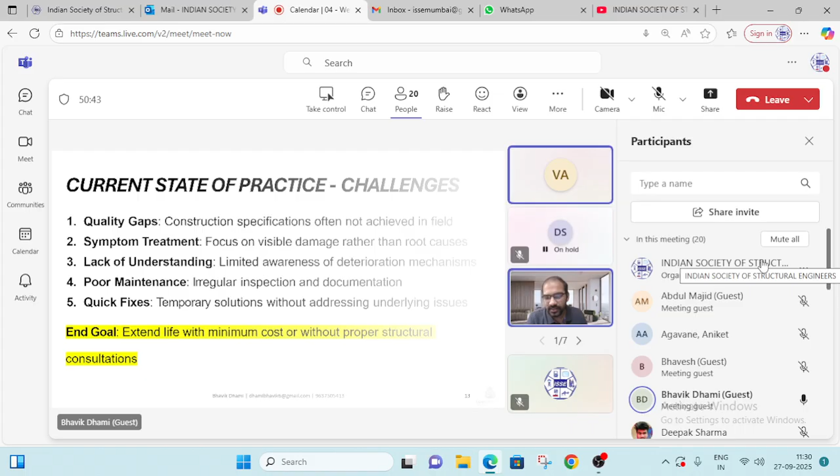You went on mute, Bhavik. Unmute yourself. Sorry, sorry. Wait a minute. Am I audible now? Yes. Has this been covered or was it muted? Yeah, this is covered. Only 1 second it went on mute. Okay, okay. This also has been covered now. Yes, yes. Okay, thank you.

So now you might be wondering, like I told previously, 90% of the problems are always related to corrosion. For example, after building a structure, there is cover available, but over time it gets some cracks, or after curing there are some shrinkage cracks. So some water enters into that particular concrete. That is a pictorial representation of when the water enters and comes in contact with the steel rebar in the concrete.

So what happens? The water starts to form cathodic and anodic reactions there. So there is pit formation on the rebar, which forms corrosion in the concrete, which starts the deterioration of the steel rebars. So that is the whole reaction there. The anodic part is there, so we require a cathodic part, which has a medium due to the water.

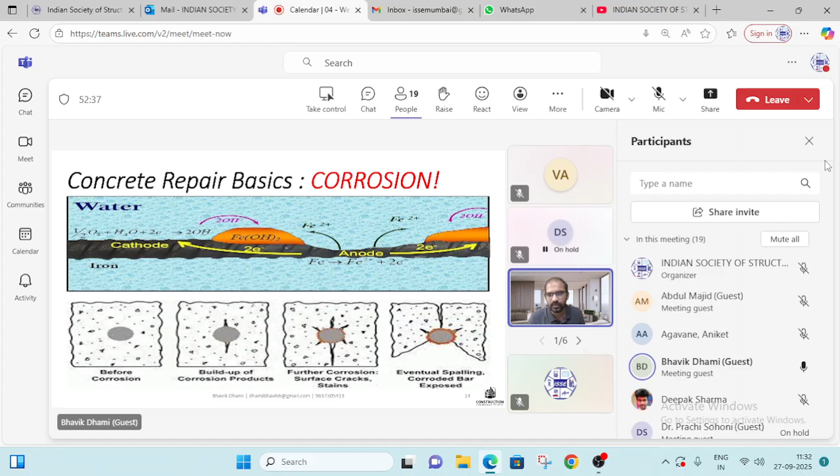Now, a plan view has been placed below here, showing how the corrosion starts and how cracking forms due to the corrosion. Before corrosion, in the plan section, you can see there is a rebar and the concrete, and over time, corrosion builds up around it. One, two, three pits are formed, then four, five pits start to form. Now that corrosion starts to accumulate on the steel rebar. So there is some gap, and due to the increase of the cross-sectional area around the rebar, cracks start to form and eventually spalling of the concrete occurs, and it is exposed to us as concrete repair being required.

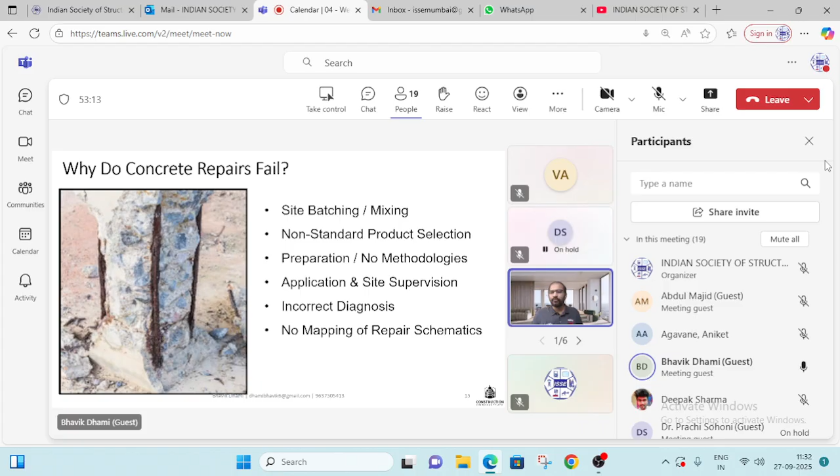So basically, why do concrete repairs fail? This is a column representing how the corrosion might look on the rebar. As I previously mentioned, they have been using site mixing, they are using non-standard products. There is no proper methodology, no proper supervision, even though the diagnostic has been done by the asset owner, but not with proper structural engineers. So proper methodology was never there, and no mapping of the repair schematics has been done or followed on site.

Now, an overview of general causes of why distress happens in concrete buildings. If you see, the majority of it is due to extreme loads. The design parameter has been changed. The structure was designed for a particular load, and now the utility has been changed. As you know, previously the concrete was not waterproof. They might use some lower grade of waterproofing material, or a non-standardized procedure, or a bitumen layer, which degrades over time.

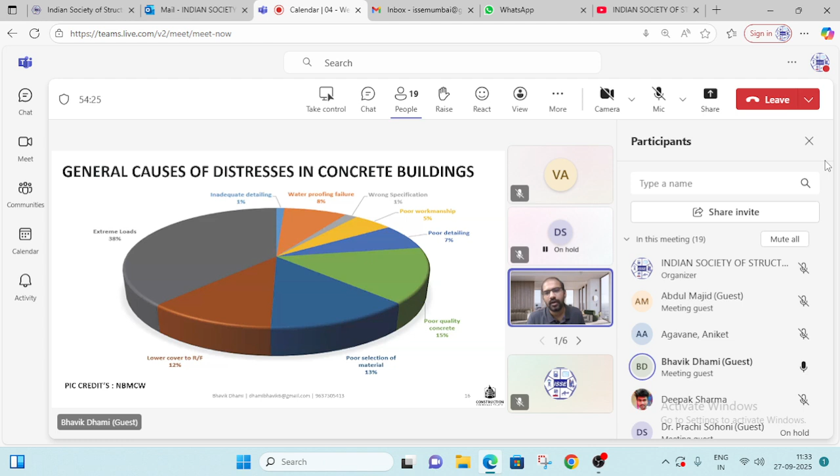So maintenance was not properly done or the workmanship is not proper. Detailing of the products or the requirements of the schematic system were not provided. Then poor quality concrete has been used, poor selection of materials. So basically, more than 50% is due to extreme loads, poor quality concrete, and poor selection of materials. And the minor part is waterproofing failure. This is the whole overview of how distress comes in concrete buildings.

Now, previously I have been talking about the repair practice that has been carried out. If you want to basically assess a building, like if you are a structural engineer, some society building comes to you and says, I want to do an NDT report, or you can say structural assessment. So there are four stages that need to take place while doing the structural assessment. Stage one would be preliminary assessment, like inspection: what is the scope, what repair has been done, the history collection, what the society members are looking for, what their scope is. We should do a one-on-one face meeting or individual meeting with the society and understand their scope and their requirement.

Then the next stage would be planning: what kind of damages you can find, what the member grouping is, and what test planning you will be covering based on your preliminary inspection with the society and site visit. Now after doing all those, you need to record all the visual inspection. So systematic documentation needs to be prepared, photographic records should be kept. You need to specify at which particular location what particular damage has been mapped. So you have to prepare a whole visual report of that.

Now in stage 4, you will be required to take a field visit and do lab testing. So you will have some NDT techniques, non-destructive evaluation techniques, or material sampling, like cores can be taken out from the structural element at different locations. We have to do the detailed analysis of both the reports and understand what is happening inside the concrete through this field and lab testing part. So to arrive at a conclusion, we require these four stages to take place for any structural assessment. It would be the same for industrial grade buildings, for infrastructure, or for any structure which is concrete in nature, or even for steel structures.

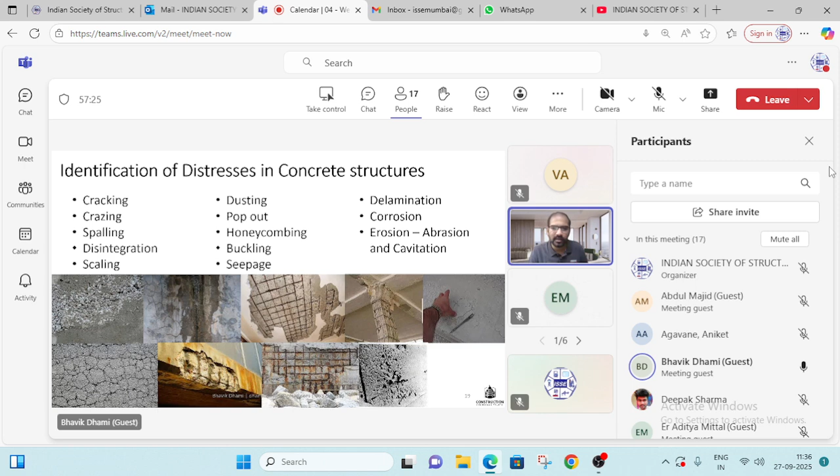So now we will be starting with the visual inspection. If you are on site, you need to identify the causes of the distress in the concrete structure. You might be able to see some cracking, spalling, disintegration, dusting coming out, honeycombing, or the structural element has buckled somewhere, or some sort of corrosion or cavitation has formed on site. These pictures can be used as an overview to understand how distress looks in concrete structures. The basic one you will see is corrosion or spalling. That is why you have been called, because normally honeycombing would be in new construction or during the repair phase when the proper material selection or proper mix was not used.

And one of the major things: whenever you are visiting site and you see a crack, there might be structural grade cracks and non-structural grade cracks. So you should have a crack gauge. It defines from 0.3 mm to 10 mm, different kinds, as you can see in this picture here.

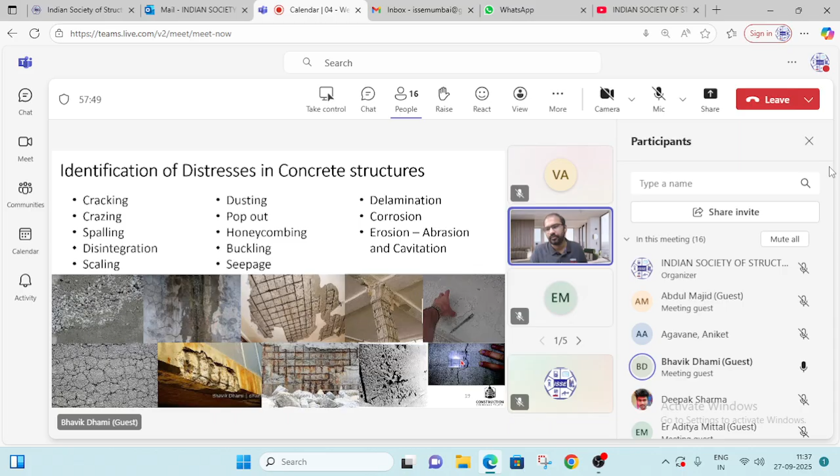Now, you have looked at all those pictures to understand how cracks look, but how do we define the different types of cracks? They can be defined into two categories: before hardening and after hardening, when the concrete is not set and when it has been set and cured. For example, before hardening there might be movement in the concrete due to form movement or subgrade movement, or plastic stage cracks, shrinkage, settlement cracks, or freezing. When the concrete gets hard, there might be physical causes, alkali reaction, drying shrinkage, or restraint shrinkage. Due to variational or seasonal temperature, you might see expansion and contraction, so there are thermal related cracks after the hardening of the concrete.

And like I previously told, the structure might be in some different area or environment, like chemical. So in the coastal environment there might be some pollutants, or in the urea plant or the fertilizer plant there might be some sulfate action, or you can say attacks taking place on the concrete, which might be the cause of cracks in the concrete over time.

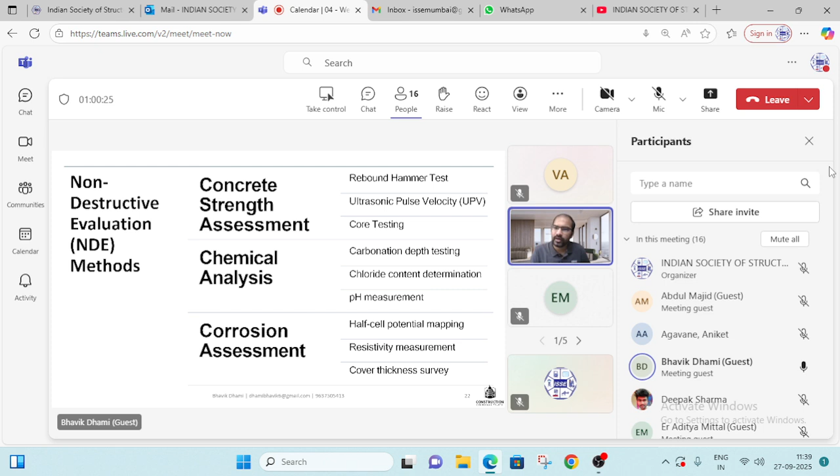So now NDT, you might all have come across this particular terminology. So why do we do NDT? Basically, it is used for concrete strength assessment, chemical analysis, and corrosion assessment. So these are the tests that we covered during the NDT part: rebound hammer, UPV, core testing, carbonation, chloride content, pH measurement, half cell potential, cover thickness.

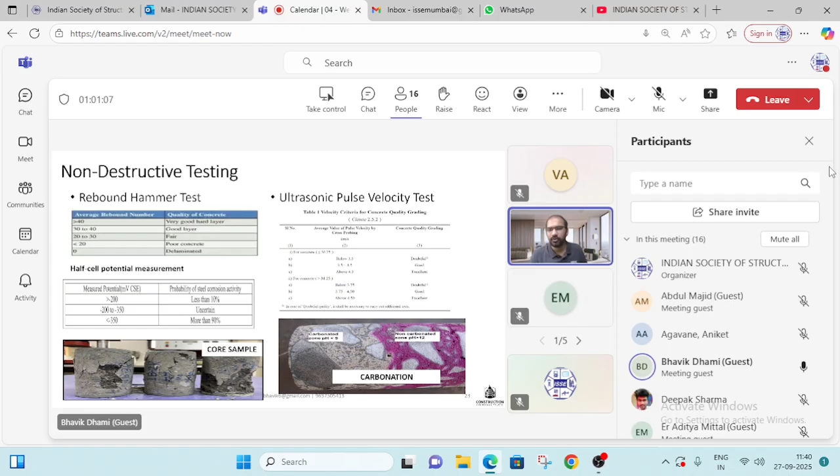From core, we will have the actual strength of the structural member. And from carbonation, we can understand the pH of the concrete, whether it is less than 9 or greater than 12. So just to summarize, what is the accuracy of each NDT method? For rebound, it might be less. UPV will be less, but for core, it will always be high. And half cell potential is a probabilistic method.

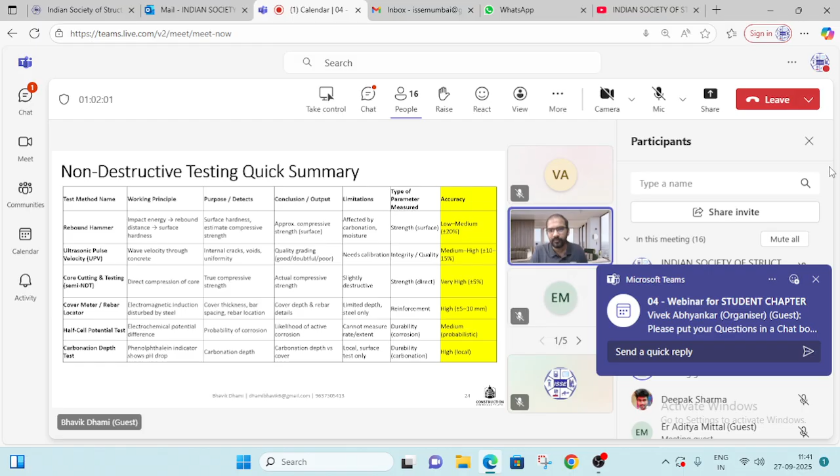In this chart you can understand how it works. For rebound and ultrasonic UPV, we will just be able to understand surface hardness and correlate what the voids and uniformity are. From core testing, we will have the true compressive strength, the actual value. Now, based on all this, we will be moving ahead, because if I cover it, it will take a lot of time. So if you have some doubts in this, we can always come back to this part.

Now, previously we have covered structural assessment stages 1, 2, and 3. Okay, stage 4 has also been covered. Now we are moving to a new section of our discussion. It will be design: how to design a repair methodology altogether for a concrete repair. So, what are the parameters that we need to take care of?

We need to take care of repair materials. So what are the physical properties? What is the chemical compatibility? What is the performance requirement? Whether it has low shrinkage, what is the thermal expansion, you should understand all the physical parameters. Then what is the pH of that particular material or the environment, whether it is low permeable, whether it requires chemical resistance.

And performance requirements are basically the bonding and the mechanical, like whether it is under static loading or dynamic loading, and what is the minimum criteria or the curing period, because some structures might have a requirement of curing of 3 hours or 1 day. So basically product selection needs to take place while designing repair materials.

Now what are the different types of repair material? Previously I have told about the polymer materials and the cementitious materials. In cementitious materials, there are PMM or micro concretes. Some grouts are also there. And in polymers, you might have some acrylic polymers, then epoxy mortars. Now, what is the selection criteria for any material? It is the same parameters that we have discussed, because we should be able to define the long-term exposure and long-term scope of the material based on our objective.

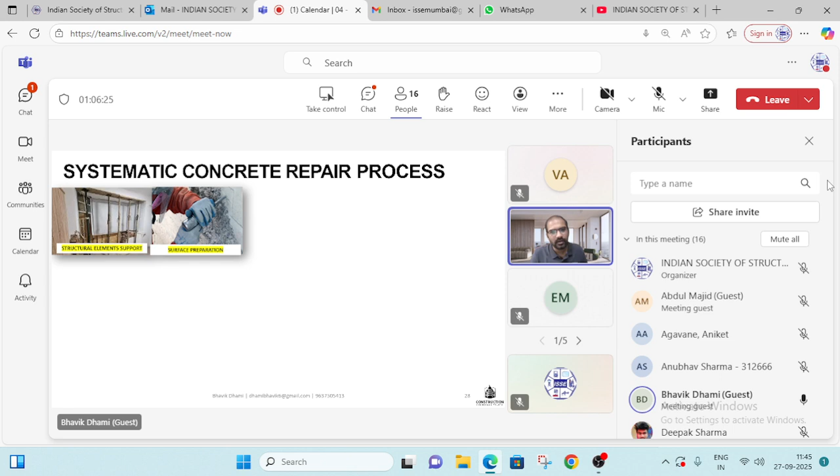Same as what I have discussed, the different phases, there is a pictorial representation. So this is how you might need to support. This is how you will be breaking. This is a corrosion control sacrificial anode that has been connected. This is a rebar that we are treating right now. Then this is how the injection grouting takes place. If you see, there is a nozzle and the crack has been covered properly. When we are applying the bond coat, proper geometry has been taken care of.

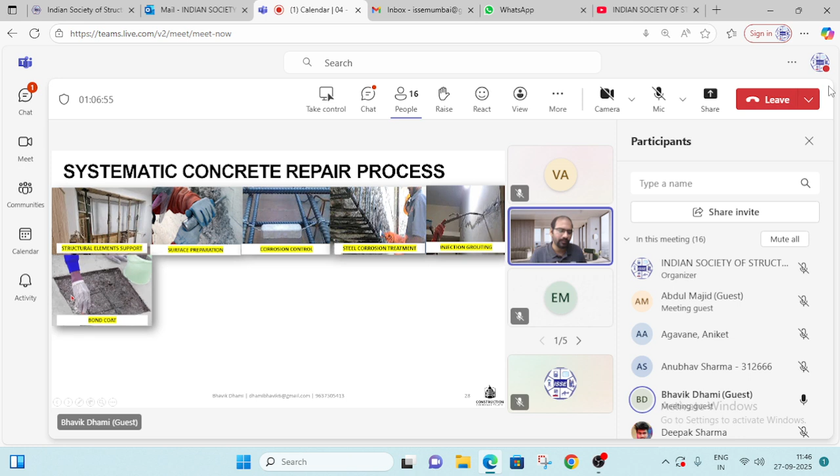Now there is a rough surface on the polymer final surface, so that additional plastering can take place after the polymer treatment. If you are not going with polymer treatment, you might require section enlargement, depending on the scope, or an FRP system. You are not going with the micro concrete, but you are moving ahead with the FRP system or steel plate bonding. It depends on our economics altogether. And this is the curing compound placed on, and the protective coating.

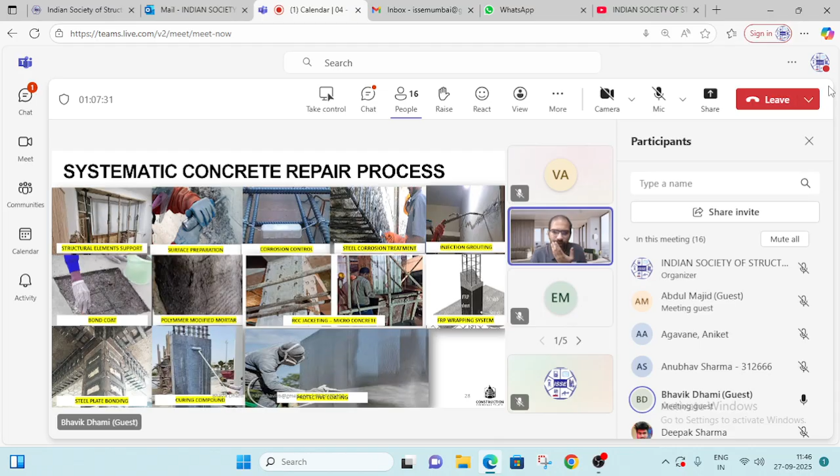Now, previously I was talking about the surface preparation part. Why is surface preparation basically the main part of a concrete repair? Basically, at the international level, we have defined CSP 1 to CSP 10: what kind of roughness is required for what kind of treatment. Like if you are just sealing, like in the injection there were some cracks we have to fill, sealers might be able to satisfy CSP 1 and 2. If we are going for protective coatings, the surface preparation needs to be CSP 3 to CSP 5. For polymer treatments, CSP 5 to CSP 9.

Then if we are placing some additional micro concrete, it might need more roughness, like CSP 10, ranging from 5 to 10. So this is the basic part if you are trying to bond. Basically what people think is, if you have just applied the bond coat, it is more than enough. But I will tell you, the mechanical adhesion or mechanical bonding also needs to be taken care of, so during the inspection of the concrete repair execution you should always check what the CSP requirement is and whether the profile has been properly achieved on site or not.

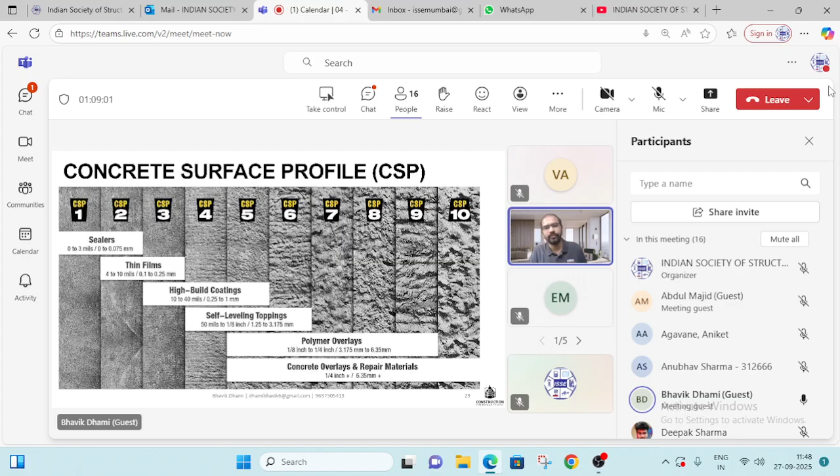Now, previously I was talking about after micro concrete or before PMM, there might be some changes, like it is not a cosmetic repair. Now, as per your project requirement, you have to propose some strengthening because your residential building has taken some load and is now used as a commercial building. So there might be some section enlargement, some external reinforcement or load redistribution criteria that you need to satisfy during your project phase. It basically covers increased load capacity, or a different system like FRP wrapping, based on your economics. We would propose these strategies for strengthening in the concrete repair.

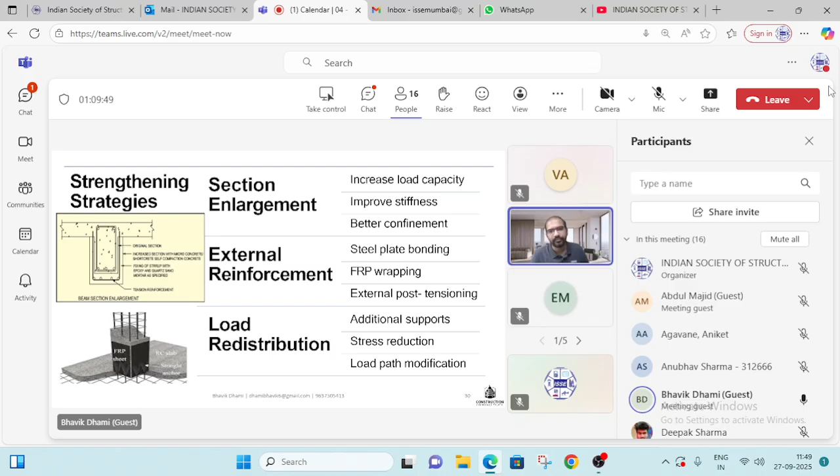Now, you have done everything properly, but we should have some framework to assess the material quality or the repair project quality. So we should always use material control parameters, like a standard grade of material, ready mix instead of site mix on site, and the workmen have to be properly trained. If you are using a certain product from a manufacturer, you should ask that manufacturer to perform a demo, or do a mock-up on site to understand how to implement it. You should also have a session with the manufacturer to train your team for that project, and be aware of the do's and don'ts of the products through the manufacturer's guidelines.

Now, we give some structural assessment and recommendations. We should also monitor: during the pre-repair phase, what was the strength, and during execution we monitor with a checklist. Post-repair, we should also have material analysis of whether we have achieved our target or not, like preparing cubes if you are doing micro concrete. Those parameters in quality assessment need to be taken care of. Next is the future maintenance strategy: documentation, periodic or preventive maintenance, do's and don'ts. These are repetition, so I will be moving forward.

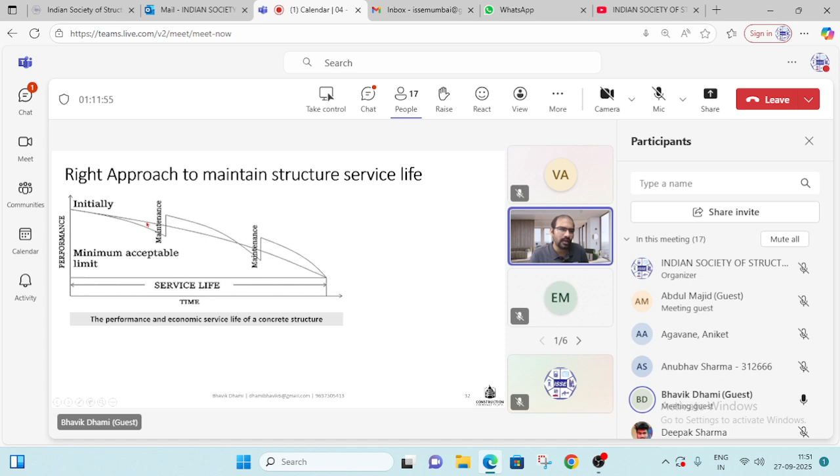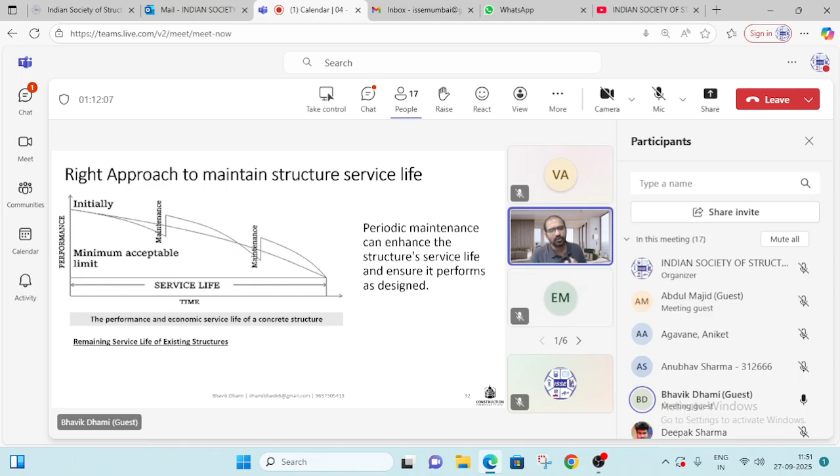So this is the whole graph of why we are doing concrete repair. Over time, the performance of the structure deteriorates over its service life. By doing some maintenance, the graph goes up a little, so performance is enhanced. So periodic maintenance is required. That is the whole reason behind the right approach to maintain the structural life.

Okay, so now, whatever we have previously studied about how the four stages have to be taken care of, the design methodology, the execution part, and how the quality framework works, let's do a deep dive into the case study. This is a four-story RCC frame residential quarters in Mumbai. I thank CPWD for the handbook having these case studies. Stage one is preliminary inspection: when was the construction done, what is the structure, what is the nearby location, and how many structures are you visiting?

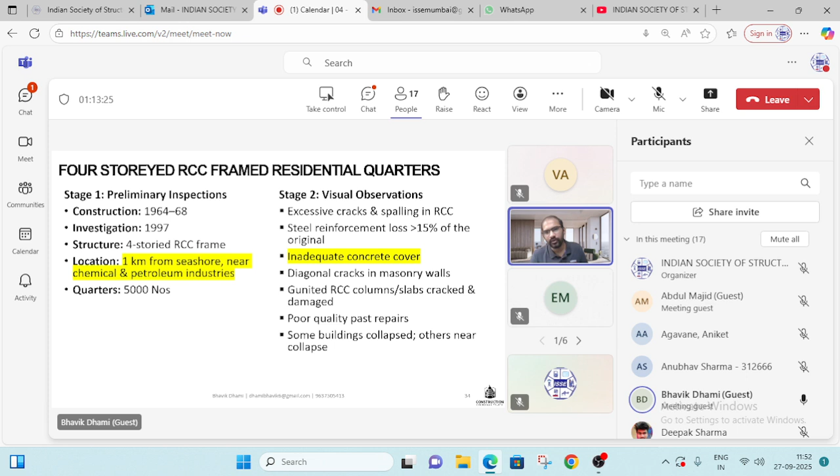Then through visual inspection, what kind of cracking are you seeing? Is there reinforcement loss, has the concrete cover gone? Are there cracks in the walls? What sort of concrete repair was done previously, or what damage can you see from your general overview? You have to record all those things. Here they were able to understand that poor quality past repair had taken place, and some buildings had collapsed and some were near collapse. Based on that assessment, we have to prepare the visual inspection report.

Now this is a photographical representation of how the building looks for one block of the type 3 quarters. So basically there are some cracks, there is some corrosion-related reduction in the balcony. Now you can see there is a damaged chajja over here. There are some RCC columns at the plinth level protection. The whole plaster has corrosion due to the steel reinforcement.

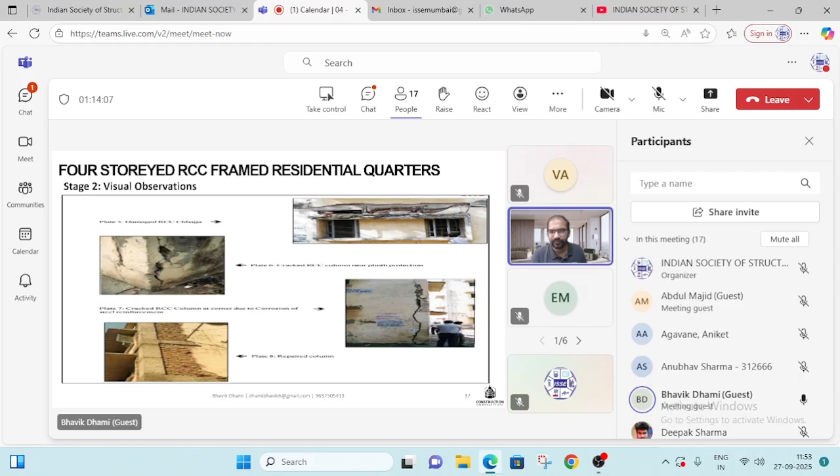Then there is a whole, you can say, lateral crack going up to a certain height through visual reports. And there are some ongoing structural repairs taking place, and how the structurally repaired block looks before finishing.

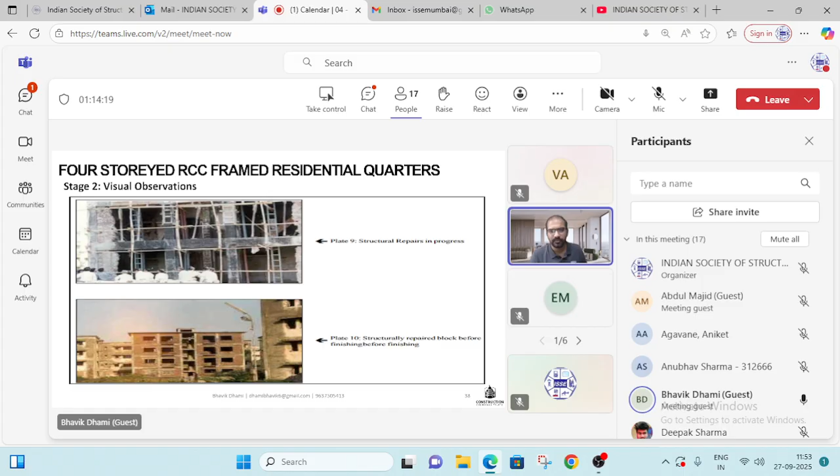So in stage three, we are looking for lab tests, like NDT reports and lab tests. So what we were able to find, the core strength is like 73.29 kg/cm², then carbonation; the rebound hammer had readings where 65% of the readings were 10 to 20 for surface hardness. In beams, it was a different range.

In ultrasonic, you might see the range as 0.64 to 2.5. The majority of the readings were less than 2 in the velocity. Majority of the readings were in the 60% criteria. In half cell potential, we can see the corrosion probability. 20% were less than the probability of corrosion, but 57% indicated uncertainty, and 23% told that there is a 90% probability of corrosion through the half cell potential.

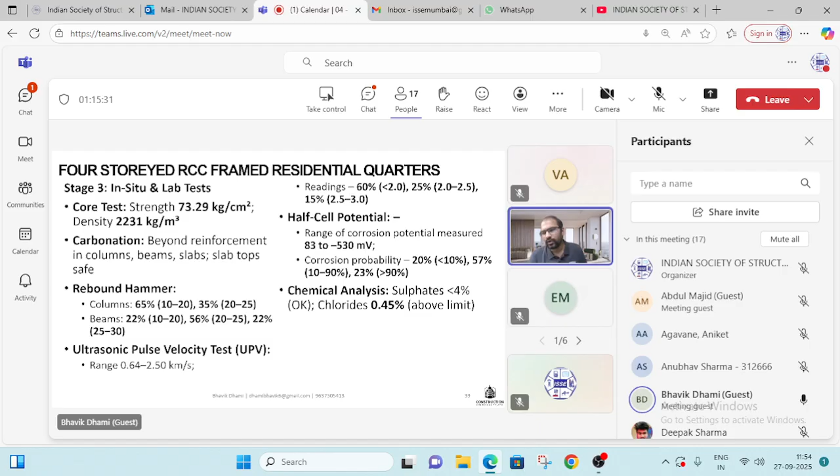So doing some chemical analysis, we were able to find that there was sulfate in the concrete structure. Chloride was above the limit since it was exposed to some refineries over there. So what are the conclusions we are able to come to from those? This is a repetition of what I have mentioned. There was chloride, high humidity, a hot climate, and the environment is a little bit acidic. So you have to give some conclusion based on your visual inspection, NDT reports, and what you have observed on site, like there is not adequate concrete cover.

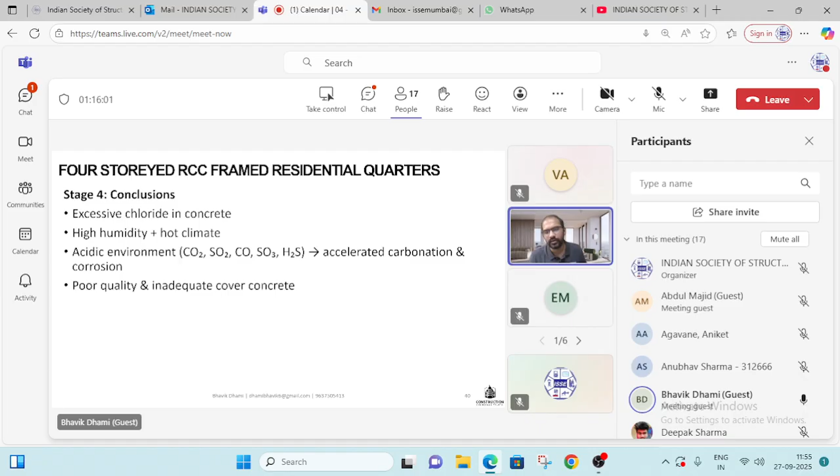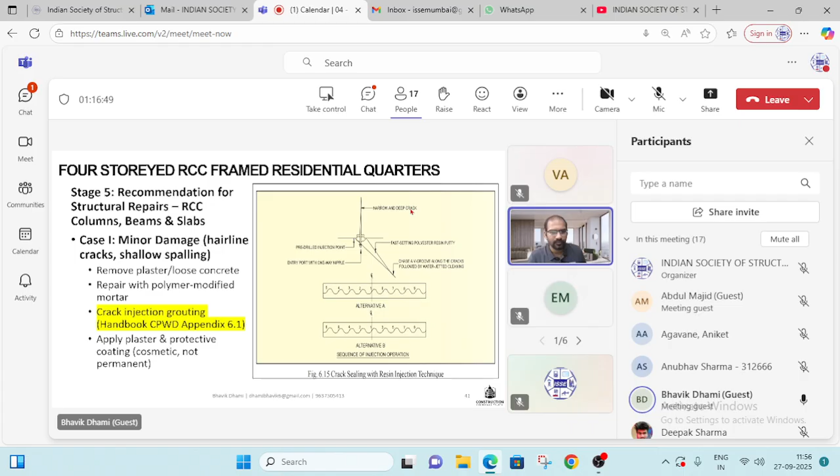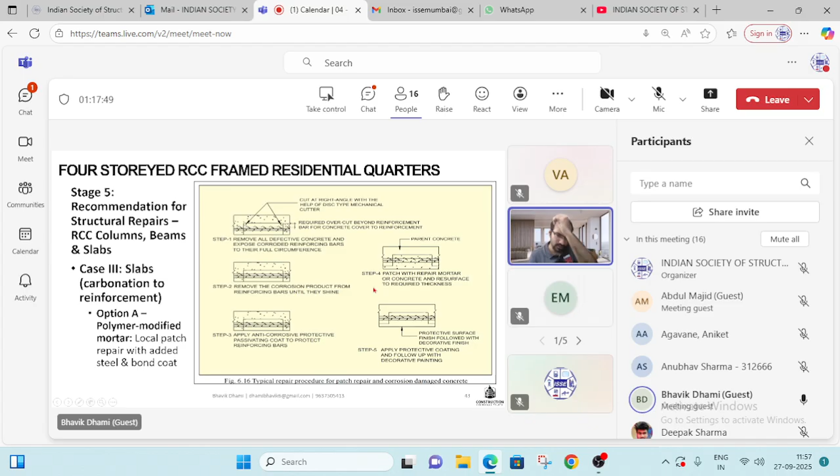And if it is severe, this is a pictorial of how it looks. See in picture one, they have removed all the defective part. They removed the corrosion product from the reinforcement, applied anti-corrosive, then patched with the repair, resurfacing to the required thickness. Now they have applied the finishing protective layer, or you can say finishing has been done with plaster, then covering with the protective coating. It is the same methodology.

Previously, since this case study is a little old, you might be coming across shotcreting. Now in the market, we also have polymer spray grade mortars available. So the same ready mix polymer material can be used for spray grade application such as shotcreting or guniting, in wet condition or the dry stage.

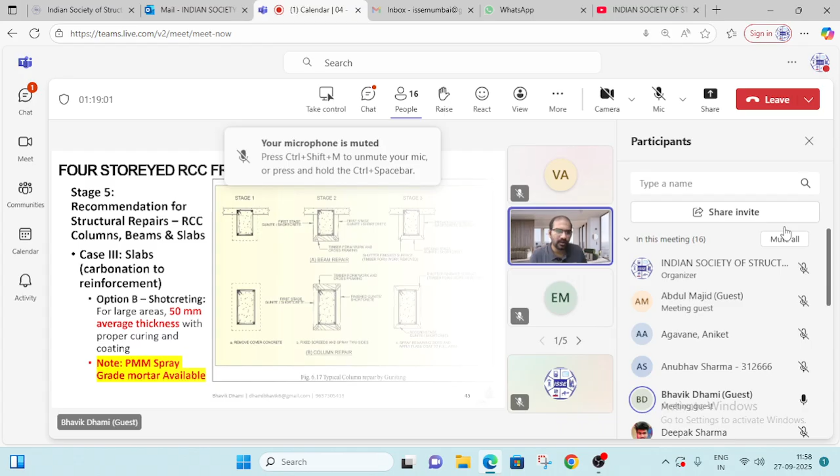So this is how basically case study one ends. So we are already at the conclusion. We gave them a proposal of what recommendations need to take place there. Now we have the second case study. This is a very interesting case study. Okay, this might not be something we see on a day-to-day basis.

It is a VIP conference center at Delhi. So what happened here? I will tell you. Basically, it was constructed in 1957, renovated in 1983. Investigation was carried out in 1990. Okay, so there are three blocks: auditorium, admin block, and rear block. So basically, RCC frame structures were there, and a steel roof on the terrace part.

Now, what occurred during the preliminary inspection? Why were they called there? Because a fire broke out, okay, in the false ceiling. So the whole second floor was exposed to fire. That same fire came to the auditorium, extended, and heavily damaged it. And the fire continued for a time frame of more than 1 hour or 1.5 hours. It is not defined particularly.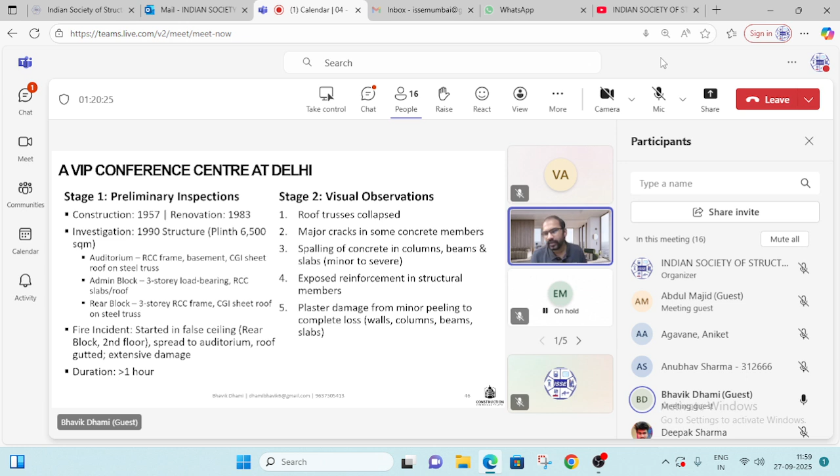So what were the observations when you go there? Okay. So basically the roof trusses were collapsed. There were major cracks in some concrete members. Spalling was observed. Exposed reinforcement in structural members. Plaster was damaged. Minor peeling can be observed and excessive deterioration in certain columns. So due to the high temperature, what happens to the concrete, you can basically see in this case study. So this is how the whole auditorium looks after the fire, and some other parts of the building. Okay.

Now doing some NDT tests and lab tests, we were able to find from the debris itself approximately what kind of temperature they were exposed to. Floor level was around 200 degrees Celsius and roof level it was 1100. Due to no ventilation or the confinement, the temperature might have risen to that sort of temperature. It is an approximate temperature from the inspection they carried out, and from core tests they were able to identify what sort of MPa they got from columns, beams, and slabs on an average basis. So columns at 16 MPa, beams at 18 MPa, slab at 17 MPa.

And based on the assessment of the UPV, they were able to identify from the velocity what percentage of the readings fell where. If you see, it is a mix of poor, doubtful, and medium. So it is a whole; you cannot depend on one. Same goes with your rebound hammer.

Now, this part, the laboratory test, it might be on a little higher side, when it was exposed to a certain temperature. So, what is the strength? So, with about 20 samples on site, they found that for lower than 200 degrees Celsius, they are able to retain 80 to 90% of their strength. For higher temperature exposure, they were able to retain 70 to 80%. And if it is beyond 300, in two specimens they found 60 to 70%. So nowhere were they losing more than 50% of the strength.

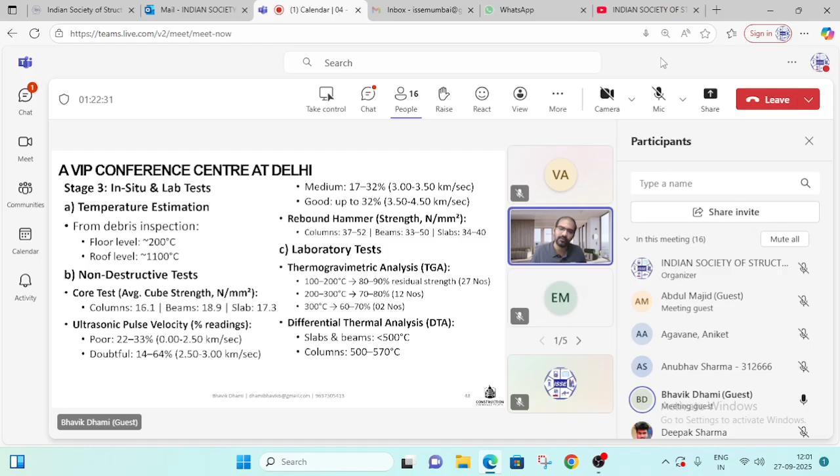So the differential thermal analysis found the conclusion that the slabs and beams were exposed to less than 500 degrees Celsius and columns were exposed to a higher grade of temperature, such as 500 to 570 degrees centigrade.

Now, what conclusion can we arrive at from that? Fire damaged members can be classified into class 1 to 4 based on your visual inspection and non-destructive tests. And we were able to understand that there is some residual strength already available from our test results. So based on that, this whole table has been prepared. So for class 1, superficial damage has been observed, with less than 200 degrees Celsius temperature.

So what would be the repair? It might be a structural repair, but based on the visual inspection, class 2 will have a non-structural grade, ranging for a temperature of 200 to 300. Class 3 will have a different temperature grade. Class 4 will have the highest, like heavily damaged or collapsed. So they might require some heavy structural retrofitting schemes there.

So as you can see, these are just generic recommendations that they have suggested for repair. Like for superficial, you can do the cement plaster. So basically, the structure has not been damaged. In class 2, there were minor or non-structural repairs. So PMM mortars or epoxy grade mortars can be used over there, with or without mesh.

Now in class 3 repair, there is significance, like 60 to 70% of the residual strength has been retained. So we have to do shotcreting, RCC jacketing, epoxy grout injection, cement grouting for honeycomb areas. And in class 4, we have to decide whether we have to demolish the structure altogether; it cannot be used or treated because the whole core strength has gone. So we can recast that whole particular section, or we have to strengthen by adding some structural element, or do some analysis and provide how we can do it.

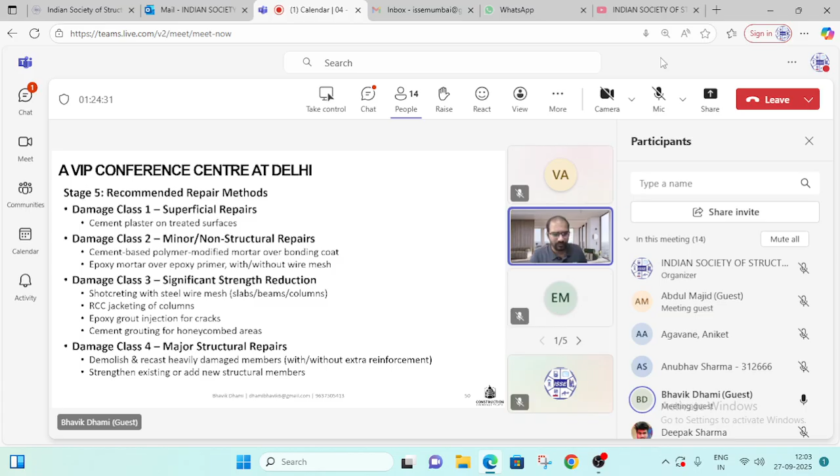Now this is important, okay? This might be the last slide of this whole session. So whenever you get some inquiry, or you are taking some project as a student or as a structural engineer in your career, you should always define what is the objective, what is the scope, and what are the methodologies, and whether it enters into the repair phase, restoration phase, or rehabilitation phase. If you are able to identify that, then only you will be able to map and classify them, whether it is class 1 damage or class 2, class 3, class 4.

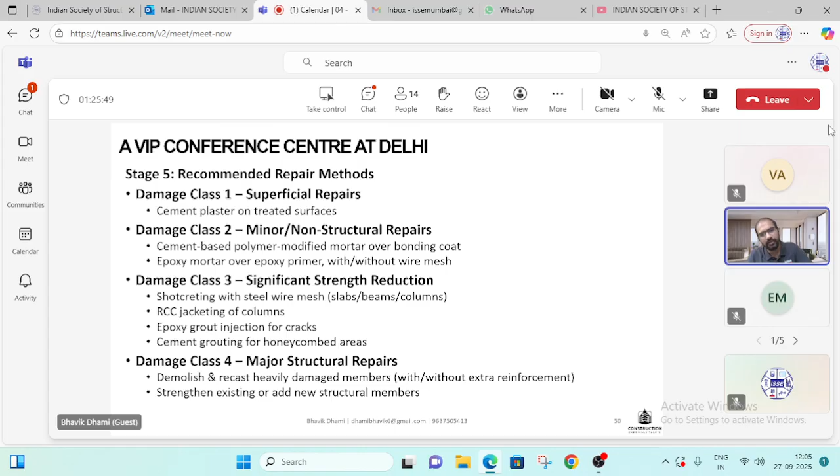So basically you are mapping your damage and giving a whole method of what can be done, whether it is superficial damage or minor cracks or major cracks or heavily damaged. If you do the proper mapping, then only you can propose and make the client understand what sort of methodology has to take place at a particular stage. So this is a requirement. This is the 3R that we discussed previously in the corrosion basics. So always, whenever you sit with the asset owner, you should define what is the objective, what is the scope, what are the methodologies, before coming to the economics part.

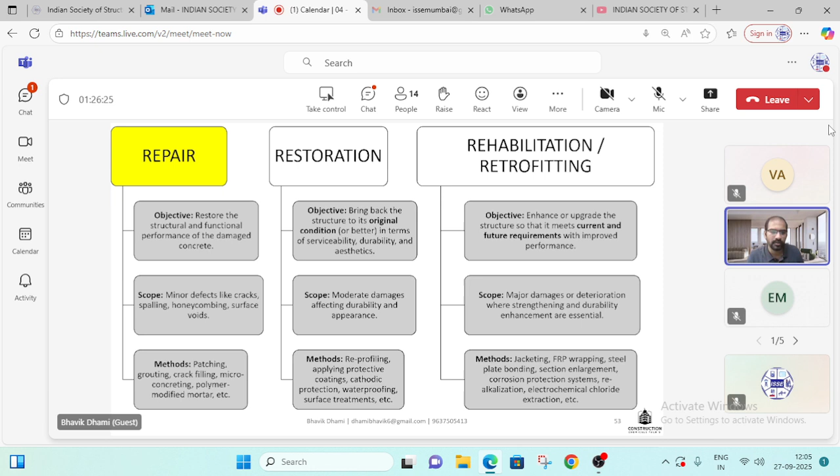Okay, so the whole presentation has been done. So you can ask me any question.

Wow, great presentation. First of all, thank you, Bhavik, for a wonderful presentation. Certain parts which you covered were really new to me, and as we discussed during finalization of the session, to give this presentation in 1 hour is a challenge in itself, because there are several charts and several tables, and to cover them in 1 hour was really a challenge. But you did a great job in 1 hour.

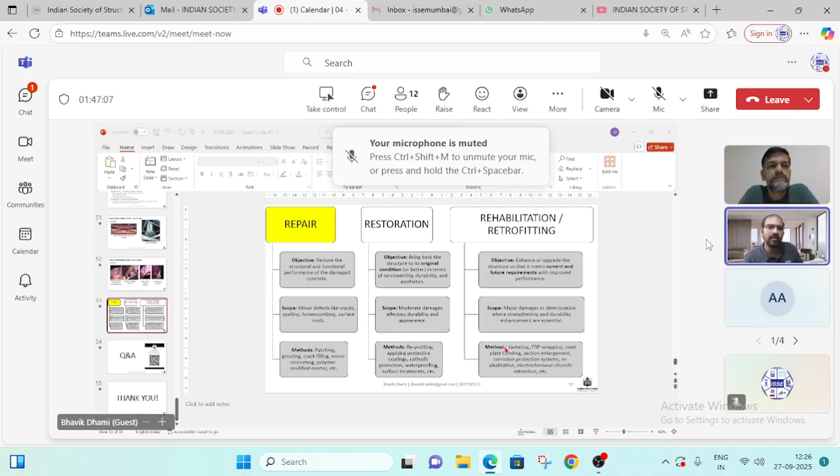Okay, so accordingly, strategies would be like section enlargement, steel plate bonding, additional FRP from the external side. Based on your combination and your analysis, you might propose those solutions. So you might need to look at the structure and define the scope, because there might be some limitation that you cannot increase the section, so you might go for FRP. There might be some limitation with FRP in costing, so you might go with steel plate bonding. So basically for FRP, there might be some shear requirement, flexure requirement. So accordingly you will design the schematics. So you model the building into FE software and get the actions.

Currently, the manufacturers that provide these supports, let's suppose L&T or FOSROC, do have structural engineers who do exact modeling, and as per those models, they get the actions, and corresponding to those actions, they give the systems.

So basically what happens, we discuss this part with our structural consultants, okay? Whenever the consultant gives us the proper data, we prepare the whole design. So we provide the design support, okay? We also have in-house structural engineers with us. But what happens, let me finish.

As a manufacturer, we don't provide the complete details to the end users, because it has to be reassessed with the structural consultant. So the customer will not have that access completely. It will depend on the structural consultant, because it has to be vetted by the structural consultant, because we are manufacturers, okay? We can say anything to you. So in field, we provide the technical support.

So it's not like FOSROC is not giving support. We have some PhD holders also onboarded with us who are working as, you can say, a product development team. So we have a complete R&D team dedicated to concrete repair and structural strengthening. And we also have a huge quantum of case studies with us.